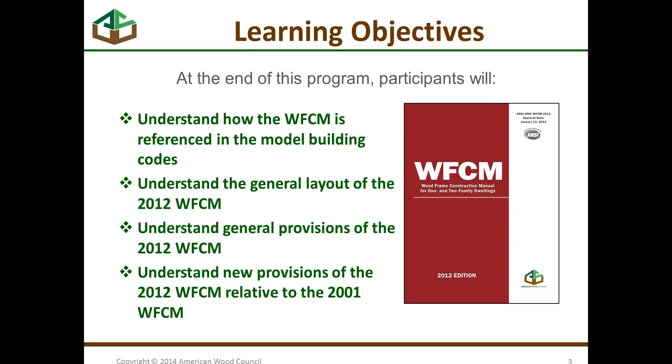This presentation is registered with ICC, as Marcy mentioned, and it is copyrighted through the American Wood Council. The learning objectives today will be to understand how the wood frame construction manual is referenced in the model codes. We'll understand the general layout of the wood frame construction manual, and then you'll hopefully understand the general provisions in the wood frame construction manual, and then finally we'll also go over new provisions from the 2001 to the 2012, so you'll get to know the 2012 changes.

Now, also, the general outline of the presentation, so you can get an idea of how we're going to proceed through this session, is we'll go with a baseline about code references. How is the wood frame construction manual referenced in the codes? And then we'll go chapter by chapter, chapter 1, 2, and 3, on a discussion of the chapters, so that you become familiar with the chapters and go over the changes in the 2012 version. Now Buddy will pick up during chapter 3, and then he'll get into some further information on the commentary to supplement, and then also future information on how the wood frame construction manual will expand its applications. And then we'll go into other resources.

Now, as Marcy mentioned, we are using an interesting tool, which is the polling tool, to get more interaction from the audience, and in no way does this affect your ability to receive your certificate of completion. But the first poll is a very easy one, to get an idea of what the audience makeup is. We'll launch this poll, and you can click on your computer, and the first question is, what is your area of expertise? And I see that people are quickly responding. We'll just wait till we get a few areas of responding. Looks like heavy engineering. Come on, builders, let's put in your input, and architects. Okay, we have a good feel for who is attending, so we'll close the poll. We're at 82% of the audience has responded, and we'll close it.

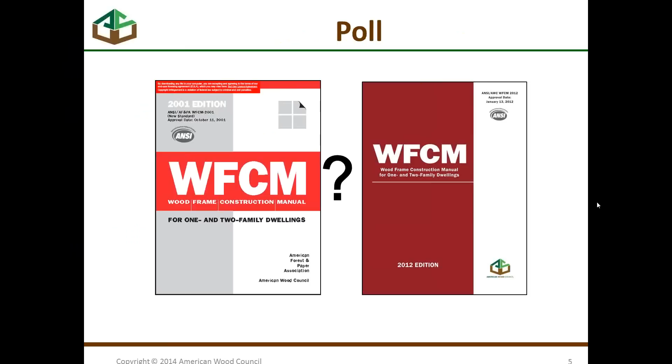Okay, what happened? Uh-oh. I closed the poll and now something happened. Okay, I'm going to have to escape out of this. Sorry about this. Something happened when I closed the poll. So I am sharing the poll right now, and for some reason, let me go back into it. Are you seeing the poll?

71% of the audience is engineering, and 9% is architects, and 16% is code officials, and 2% is builders, and then we have 2% of other.

So the next question has to do with getting a little bit more feedback on the background of the use of the wood frame construction manual, just to give an idea of the audience. So we'd like to know which of the following statements is true. I've used the 2001 wood frame construction manual. I've used the 2012 wood frame construction manual. Or you've never used it at all, and you've never even heard of the wood frame construction manual.

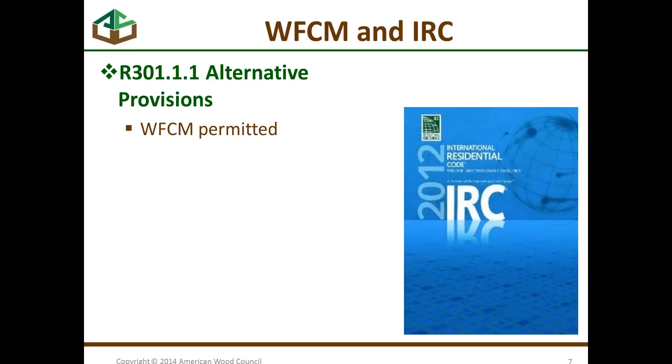So the wood frame construction manual is adopted under the IRC 2012. And here's the specific code reference where it's adopted as an alternate to the IRC. Also for wind design, when we have buildings that are required to have wind design or where the wind speeds are greater than or equal to 110 miles per hour, you can also use the wood frame construction manual. Note that it states that you can use the wood frame construction manual or ICC 600, which is a relatively new standard that's adopted in the IRC.

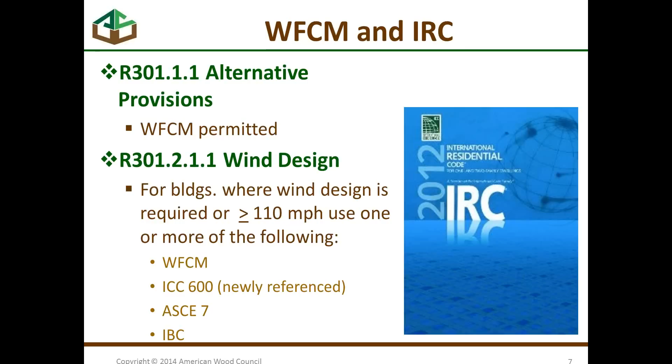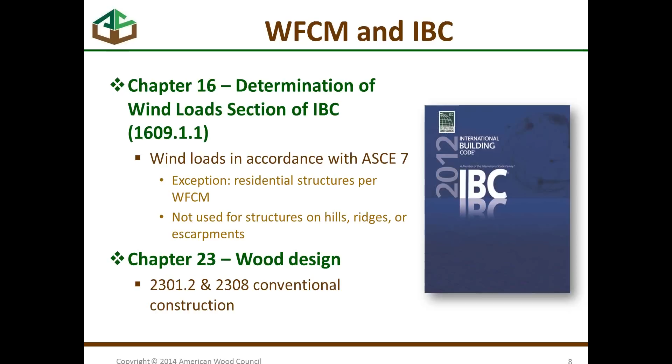And within this is for residential construction in high wind areas. It does mention that if you're designing a wood building using the ICC 600, then it needs to comply with the wood frame construction manual. So that's one reference. So for wind design, the wood frame construction manual is a great resource to go to for designing. Also, under the IBC, it's referenced under Chapter 16 for wind loads, for those that are for residential applications. And then in the next slide I'll explain that a little more. But under Chapter 23, it's referenced as a standard. For those buildings that you're using the conventional construction, the wood frame construction manual is referenced as a standard to be used under conventional construction as well.

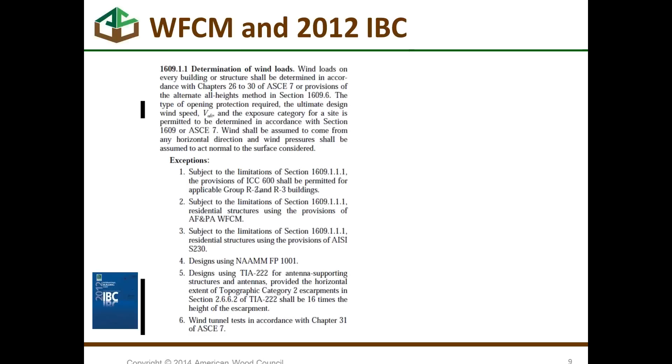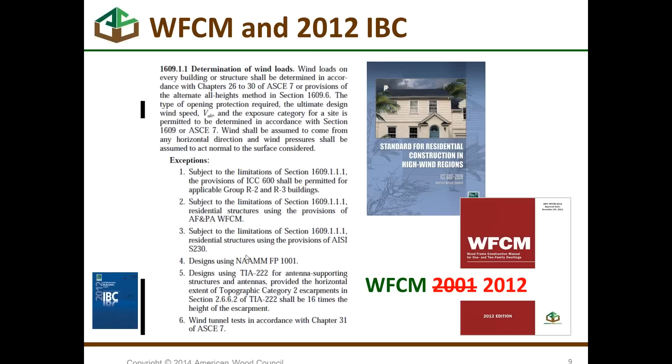So I mentioned using it for wind loads under the IBC, and this is the exact statement from the IBC code. First it says for determining wind loads, you can go to ASCE 7, but it also says that, subject to the limitation of 1609.1.1, you're allowed to use the ICC 600, which I mentioned previously, and that's for residential R2 and R3 buildings. But it also states you can use the wood frame construction manual. Now the previous code referenced 2001, and the current 2012 code references 2012. And this says within the limitations of 1609.1.1, that has to do with escarpments or hillside applications where you have some special requirements. But other than that, you're allowed to use the wood frame construction manual. And I'll go into that in a little bit regarding the ASCE 7-10 and some items related to that.

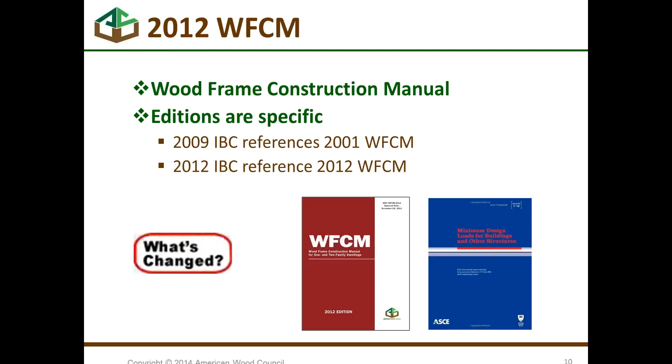But again, under the 2009 IBC, it referenced the 2001 wood frame construction manual. And then under the 2012 IBC, it references the 2012 wood frame construction manual. Now, what's handy about our website is if you go to our website, there are all these little icons that say what's changed. If you click on that icon, that'll provide you with a really quick white paper about what has changed from the previous editions. And that's true for our NDS documents or our wind and seismic provisions. This little icon will give you more in-depth information about the changes.

Now, the wood frame construction manual is laid out in 3 different chapters. We'll start off with chapter 1, which is a general chapter, and then chapter 2 covers engineered design, and chapter 3 covers prescriptive design. So there are 2 methods of design that can be used under the wood frame construction manual. As I mentioned previously, I'll go through chapter 1 and chapter 2, and Buddy will pick up on chapter 3, rounding up. But the general layout of chapters 1 and 2 is connections, then it gets into floor systems and wall systems and roof systems. And this is kind of a reverse of how we would design an actual building. Typically we would start from the roof and work our way down, but it's laid out this way to mirror the layout of the IRC, the International Residential Code. And then we have a supplement that's part of the wood frame construction manual and the commentary, which Buddy will give more information on in his presentation.

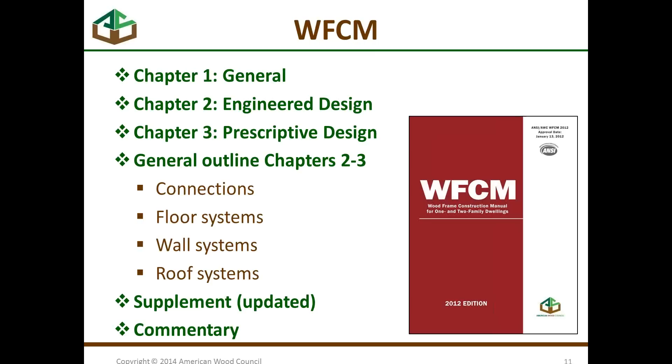But first, starting off with general. If you have your wood frame construction manual, you may want to go through and follow along with this. It would be helpful. If not, it's not a problem. We are going to have the notes available after the presentation, or Brian is giving you links to the PDF

of the presentation. But starting off with the wood frame construction manual, chapter 1 starts off with the general provisions for the entire manual, and it gives you tips on the limitations that are provided for this. As many of you are aware, we need to provide some boundaries or guidelines by which we design buildings, and the same is true as what we provide as guidelines for developing the manual. This provides you with overall building dimensions and then load assumptions that were used when creating the document.

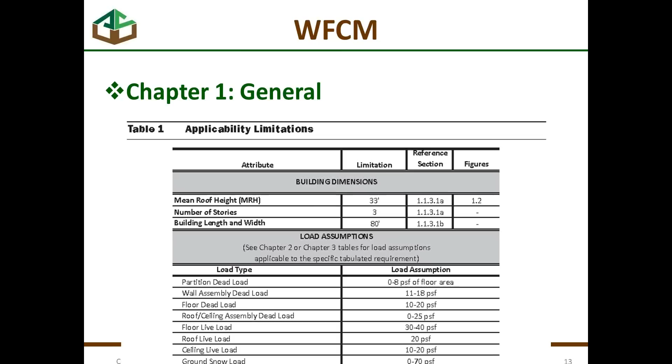And then chapter 2 and chapter 3, when it breaks into engineered and prescriptive, there are also some additional load assumptions that are provided. And that's all in table 1 of each of the chapters. As you noted in the previous, there are special limitations that are noted for the actual overall dimensions of the building, and they're repeated here. Mean roof height of 33 feet, 3 stories, and then the overall dimension of the building is 80 by 80.

But one thing that is new to the 2012 wood frame construction manual is the incorporation of the design requirements in ASCE 7-10. That is new. So now we're all up to speed with ASCE 7-10. These are the parameters that we cover within the wood frame construction manual, which is 0 to 70 psf ground snow load, and then 110 to 195 miles per hour wind speed.

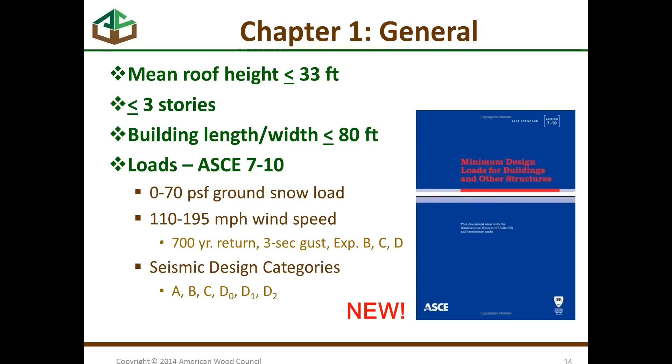And I'll get into a little bit more detail about the wind speed, but we also cover seismic design categories A, B, C, and D. Now, D, some of you may not recognize this if you're only using IBC, but IRC uses these subcategories of D sub 0, 1, and 2. And the seismic design is based on the alternative simplified method in ASCE 7. So something to be aware of. So this is all new to the wood frame construction manual.

Now also, just as a side note on the background of ASCE 7-10 and some things that you might want to be aware of regarding ASCE 7-10 relative to ASCE 7-05 is the balanced and unbalanced loads. It does take into account the ground snow loads. Now that is not different from 7-5, ASCE 7-5, because that was incorporated in ASCE 7-5, but we just wanted to make you aware. It still takes into consideration unbalanced and balanced loads. So there's relatively unchanged values from the 7-5 to the 7-10.

Now, the wood frame construction manual does not take into account sliding snow, because that is really a load condition that is specific to a building, and we couldn't really provide that for all different types of buildings. So that is not in consideration. That will have to be approached or designed separately.

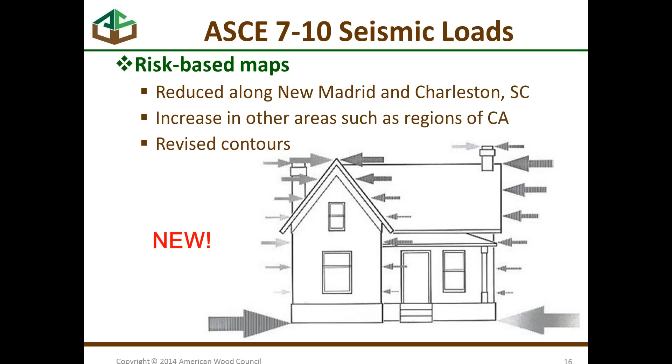And more side notes related to wind speed maps is, if you're using the code now, you would see that they are strength design based maps now that show higher wind speeds, but the overall effectiveness of the wind effective pressures remain about the same.

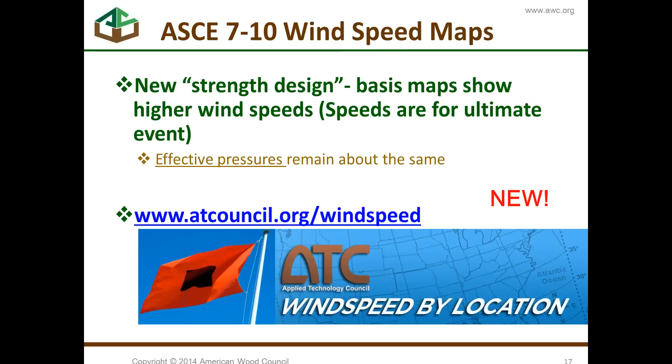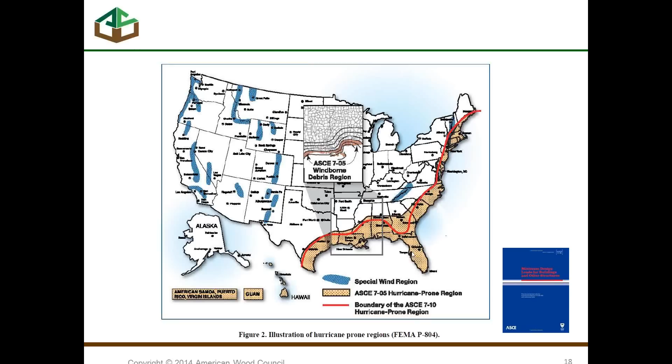the ASCE 7-05 area, and then the red line delineates what the new contour lines are for ASCE 7 for the hurricane-prone region. So you can see in some areas you're going to get a reduction in your wind speeds and overall pressure, whereas these will remain the same because the new contour maps have not changed. But that's where you're going to see some changes.

Now, getting back to the wind speeds, this is important because there are some subtle differences between IRC and IBC. The IRC did not adopt ASCE 7-10, and they're still on the allowable stress design. This is the basic wind speeds under ASCE 7, and if you did a calculation, the equivalent wind speed would be 110 under the ultimate or the strength design, and then 116, so accordingly 110 would be 142. So that gives you the actual mathematical increase if you're going to the ASCE 7-10.

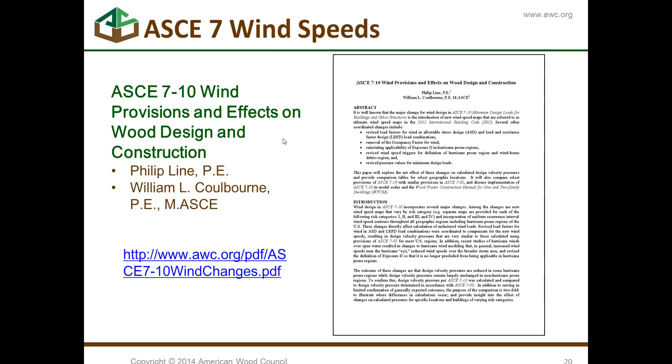So using those maps, if we go back, we look at IRC, which is based on allowable stress design, we have 85, 90, and 100. However, using the wind maps under ASCE 7-10, you can see that, and again, these are the equivalents, so you have 100, the equivalent is 129, but the map in ASCE 7 shows a 130 contour or 140 or 150. So there's not a direct correlation between the maps in ASCE 7-10 and ASCE 7-05.

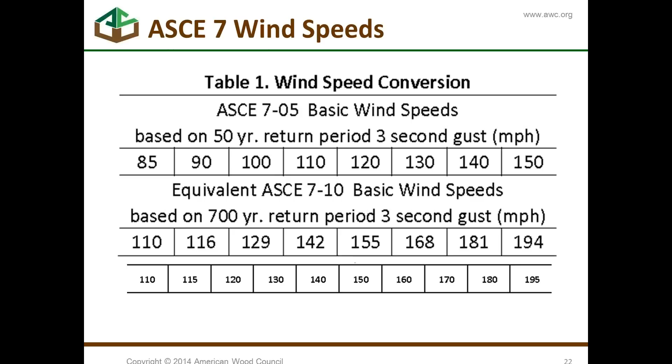So you'll have to work with the building officials if you want to use the maps in ASCE 7-10 and figure out which contour you will use, because at 160 or 130 miles per hour, the ultimate would be 168, but would you use 170 or would you use 160? Again, you'll have to work with the building official on what values you want to use. But the one thing to remember is that the Wood Frame Construction Manual is based on ASCE 7-10. Hopefully this hasn't confused you, and if you need more clarification, you can contact us and we can hopefully explain it. But that white paper will explain it in more depth.

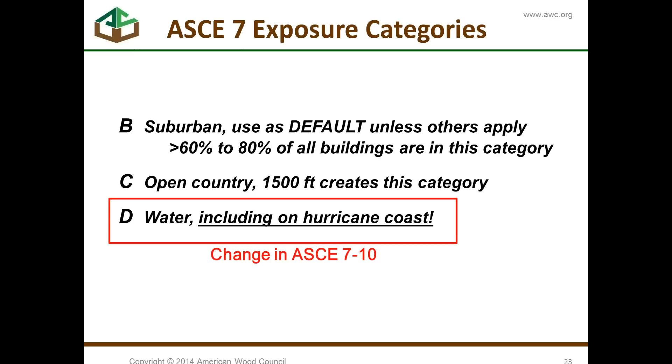Now, the wind exposure categories are incorporated within the maps, and for the hurricane-prone areas, it does incorporate, again, exposure D in those hurricane coastal areas. One thing to be aware of. Getting back to the Wood Frame Construction Manual and Chapter 1, we're going over all the basic lateral loads and the dead loads and all of that.

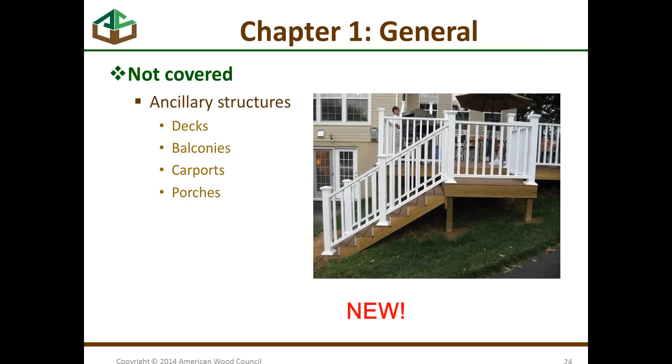One thing that is new to the Wood Frame Construction Manual is a clarification of what is not covered in the Wood Frame Construction Manual, and that is those ancillary structures such as decks, balconies, carports, and porches. Those are not covered, so you'll have to look at another resource for designing those. For example, DCA 6 for designing the deck, which is a free download from the American Wood Council website and covers deck design.

Now, we'll do a poll. This is our third poll. And again, your certificate of completion is not dependent on your answer for the poll. But the question is: does the Wood Frame Construction Manual include both engineered and prescriptive design? The answer is either true or false. Does the Wood Frame Construction Manual include both engineered design and prescriptive design?

And we are getting some really good responses from the audience. Good participation, actually excellent participation. And we're at about 75. I'm just going to close it right now for sake of time, but the majority of the audience has participated. I'm closing it, and I'm going to share the results. And the results are 89% of the audience that responded said it's true, and 11% said it's false.

Well, the answer is, let me go to this, the Wood Frame Construction Manual includes both engineered design and prescriptive design. So again, your certificate does not depend on the answer, but the response is true. Yes, it includes both engineered design and prescriptive design. Now we'll get into Chapter 2, and we'll cover the engineered portion of the Wood Frame Construction Manual.

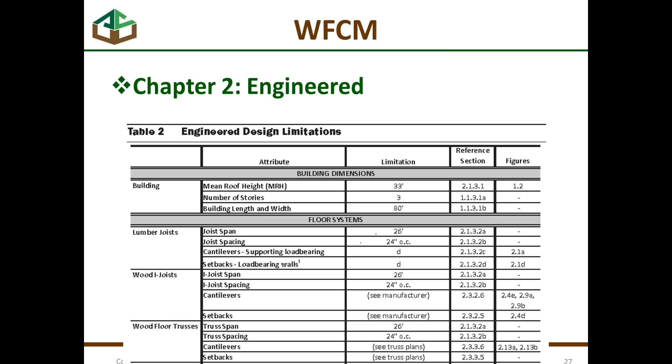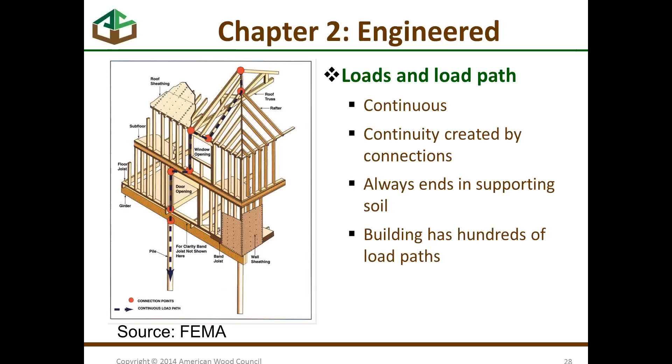Sorry about that, audience. Okay, so the Wood Frame Construction Manual has an engineered table that shows you the engineered design limitations. And backing up, when we design a building, we want to make sure that there's a continuous load path through the building, meaning that there's continuity created by the connections from the point of origin. It all needs to go down to the soil. So there are a lot of different load paths throughout the building. We don't want to rely on, many of you may have heard of that term, skyhook. There is no such thing as a skyhook, except in your imagination, but not in real life in buildings.

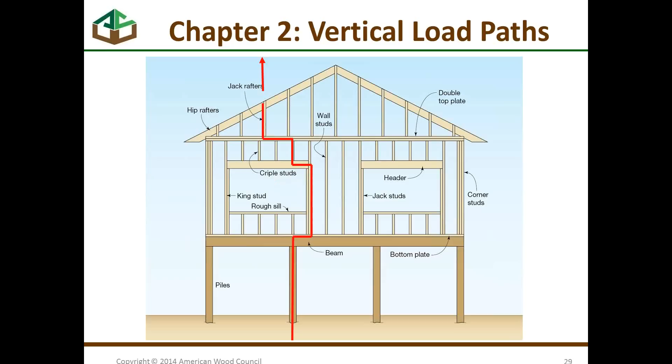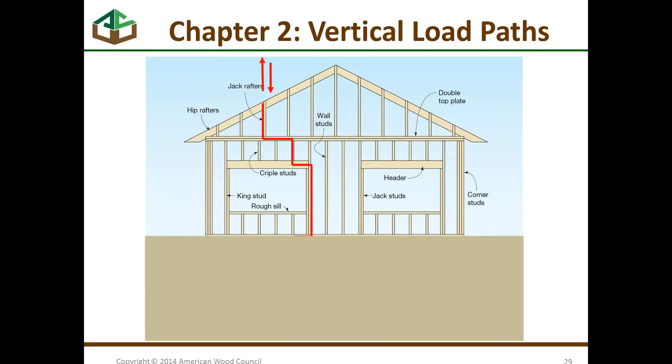We want to follow that continuous load path. Whether it's vertical loads, we want to make sure all that load gets transferred throughout the building all the way to the foundation, whether it's a building on piles or a building on a foundation. It all has to be complete, and that's the assumption in creating Chapter 2. Also for lateral loads, this is very important, and this is something that's not always intuitive to engineers or architects or builders, because we don't always deal with it, it has to be a complete load path from the point of origin to the foundation. And again, that applies to a raised pile building or one that's on slab on grade or a raised floor on grade.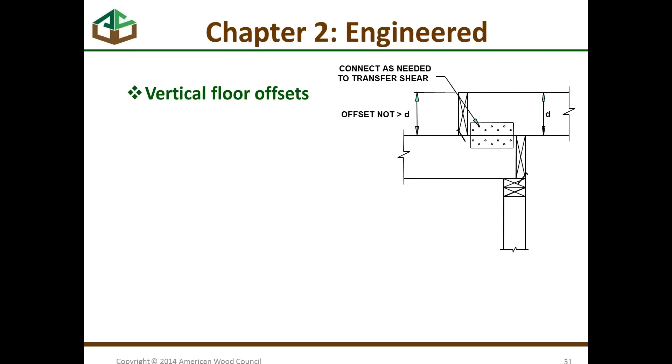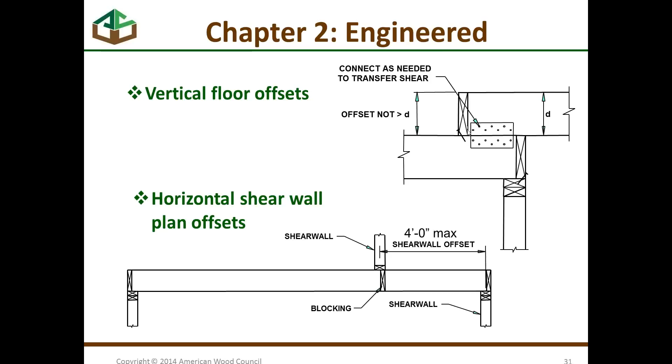Now, the engineered portion also provides you with parameters on what the assumptions are when engineering a building. If you have a floor that has a vertical offset, that offset is limited to D, which is the depth of the joist. It can't be anything greater than that. For horizontal offsets, say a shear wall, the maximum offset from the shear wall below is 4 feet maximum. And of course, throughout both of these situations, there needs to be that complete load path of engineering the transition of loads to make sure it's going to the point of resistance.

Now, connections. I wanted to go over a little bit of the vocabulary that's used throughout the presentation related to connections, because I saw when Buddy and I were going through it, maybe this is an East Coast or a West Coast thing, but the whole vocabulary of out of plane and in plane, there are 4 categories that I wanted to go over. One is when we're dealing with connections and we're talking about lateral, there's a section on lateral. We're talking about out of plane, not in plane, but out of plane connections.

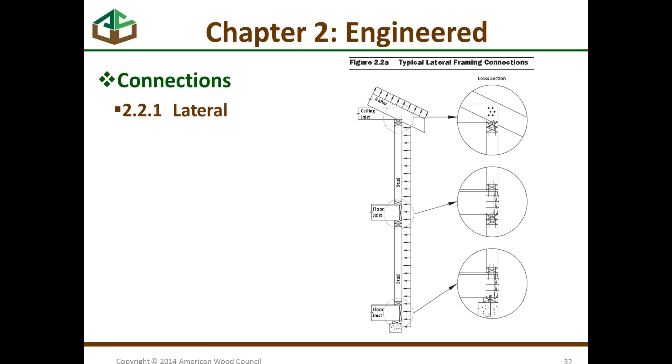So here's a building, and this is something that I changed in the notes. I'll change this in the PDF because it showed an incorrect figure. But when we're talking about lateral, the lateral is out of plane. So anything out of plane, a connection that connects this wall to the resisting diaphragm, is out of plane. That's lateral. Now we're talking about shear. Shear is in plane. So whatever is in the plane of the wall is shear.

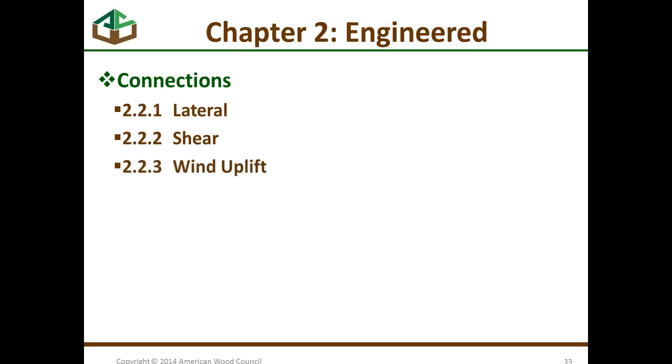And then if we're talking about uplift, we're talking about the rafters being lifted up or the whole wall being lifted up, the resistance of uplift due to wind loads on the building. And then if we're talking about overturning, we're talking about the overturning of a shear wall. So it's the overturning of the shear wall in plane. And this is to provide some dimensionality when we're reading through a document. You don't always get that dimensionality of which direction we're talking about.

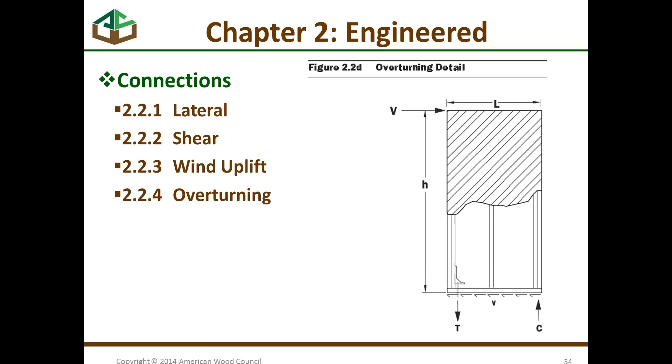So this, to be clear, and this is explained in these sections, overturning is the overturning of the shear wall, and uplift is the uplift related to wind, vertical uplift. Because sometimes if you're talking about seismic, you could say the uplift at the end of the shear wall, but that's not what we're talking about. Hopefully that clarifies it. If you need more information, you can go to those sections and get more information.

Okay, also included in the engineered portion of this is, and this is the great thing about this manual, how it will tabulate the loads for you so you don't have to go through all the calculations to find out what load you need to design a certain connection. This wood frame construction manual will provide that for you. So you just go through a table and say you're designing a thrust connection or you have a collar tie or a rafter tie. This will provide you with the output.

Say if you have 20 pounds per square foot, your pitch of your roof is 6 and 12, and your span of your roof is 20 feet, the actual load that you need to design for is 300 pounds. So pounds per linear foot, sorry, on that roof. So that's the connection load that you will need to design. It does that calculation for you.

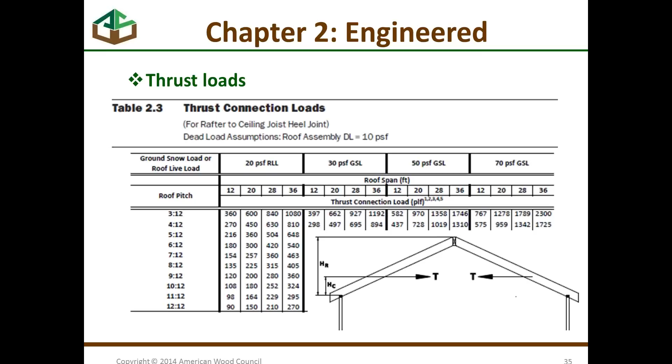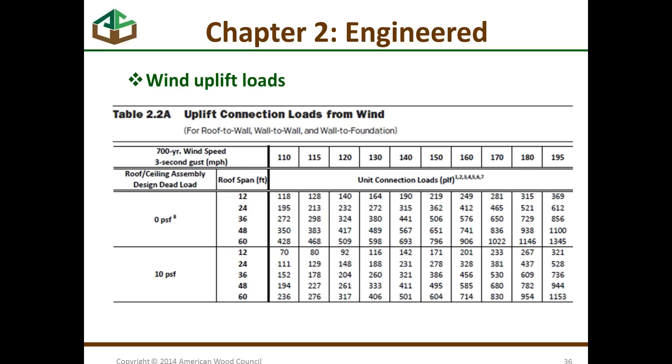In addition, uplift connections. If you're doing an uplift on a building, this will provide you. You just go to this tabulated load and you pull out the 140 miles per hour. Your roof span is 36 feet. It'll give you 321 uplift pounds per linear foot. That's what the connection needs to design for. So it does all the calculations for you, and it's all tabulated.

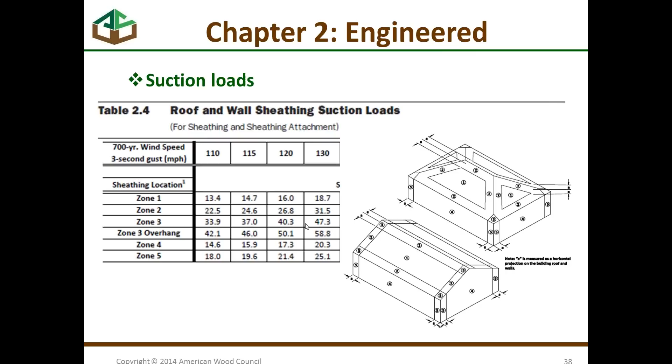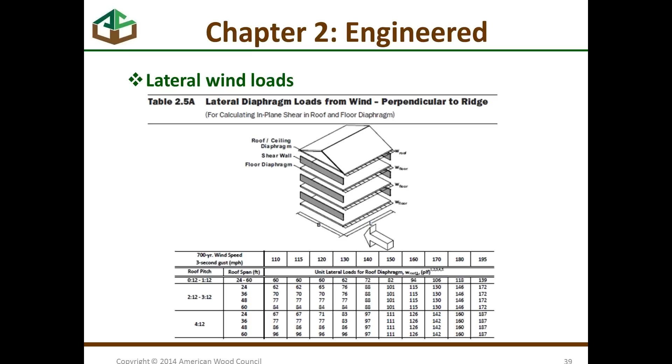It'll also provide you with the wind load suctions, so you don't have to go through all the rigorous calculations in the zones. It gives you the actual wind loads for that building. And then lateral load, the wind loads for the diaphragms. I'm sorry, this table covers the diaphragms. It gives you those lateral loads. Again, making it quick shortcuts so you can just pull the values out of the table and then design your diaphragm accordingly.

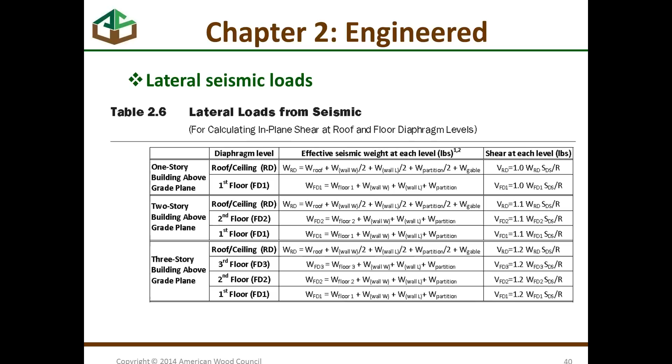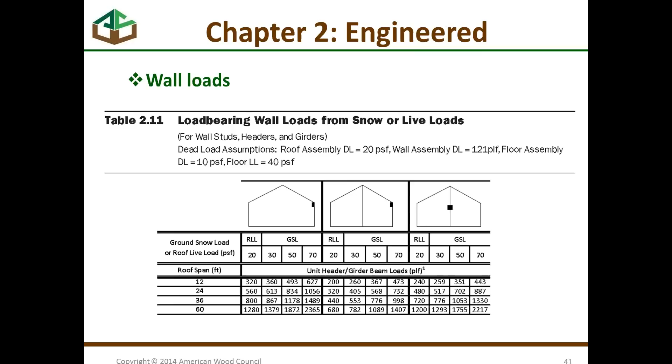And then lastly, the seismic loads. Because there are so many different parameters for seismic loads, it does not give you the actual load, but it gives you the equations for calculating the seismic load. And then this is true for load-bearing walls. So for snow loads and live loads, it gives you the unit header or girder beam loads for that girder or beam in that line. So very handy tables to help.

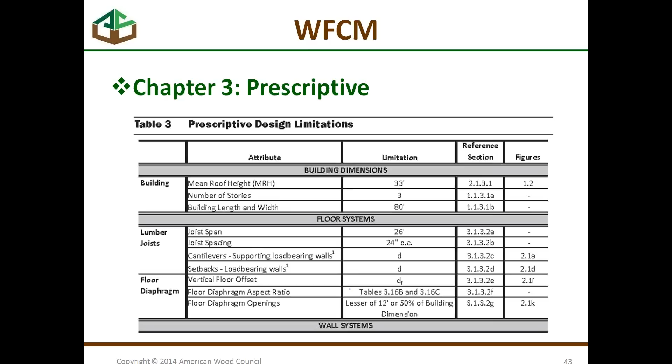Here we've actually tabulated those floor diaphragm limits in tables 3.16B and C, so you'd have to check there to make sure that your structure is within those limits to be able to use Chapter 3. Another feature of the wood frame construction manual is if you exceed the limits of, say, the prescriptive section, it gives you the option to go back to the engineered section and use that if you're within the limits of the engineered provisions, and then if you fall outside of the engineered provisions, it gives you the option to go out and use an NDS or wind and seismic standards, something like that.

So what are prescriptive provisions? They provide very specific resistance requirements. So Michelle's done a great job sharing with you about the load provisions of the standards.

So we, in Chapter 2, show you the snow loads, the wind loads, the seismic loads, and how those are going to be present on different parts of the structure. In Chapter 3, then, we give a solution to resist those loads, what's called a prescriptive solution. So we'll give the size of the header or the rafter or the floor joist or the number of connections needed to connect those building elements together to resist those shear, lateral, and uplift loads that she talked about as well. And so the table's a really handy approach to see if you're within those limits, to see if you can even use those prescriptive requirements.

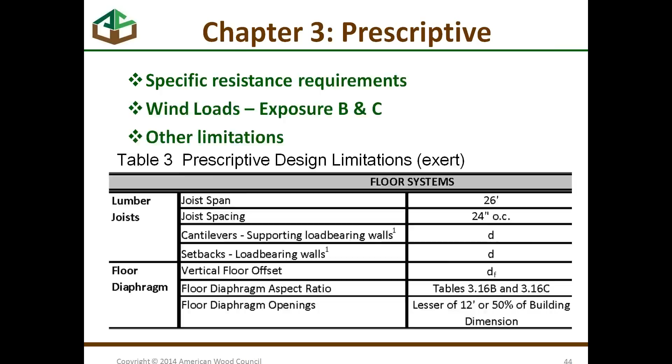One of the things that's new to Chapter 3 is the shear wall offsets. In the 2001 wood frame construction manual, we made some statement to the effect that you could have a shear wall offset by this distance D as long as you maintain your load path. Well, that typically required an engineer or somebody to spec out something for that load path. So we added some detailing here, and then for the cantilever as well, to show how to maintain that load path and resist those overturning loads that would be present in the shear walls that are on offsets. So those are some of the new details you'll see.

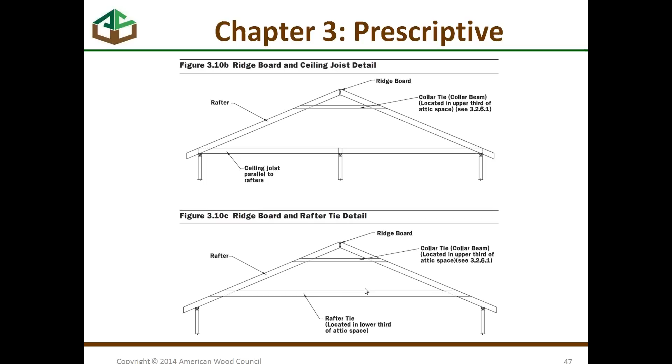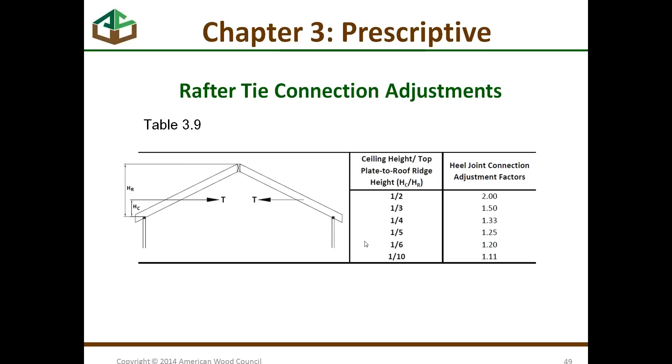And so we talk a little bit more in other chapters about those adjustments, because when you get that thrust at the heels, it's going to be much higher as you move your rafter tie higher up into the attic space here vertically, and so those loads increase. So you have these increase factors. So where if you were able to use, say, 4 nails here at the heel for a ceiling joist to resist that thrust, if you go up at least halfway into the vertical space, you see the factor here for 1/2 is a factor of 2, so that would require 8 nails instead of 4. And so we account for that in the tabulated values as well to make sure that you can maintain the load path down through the structure.

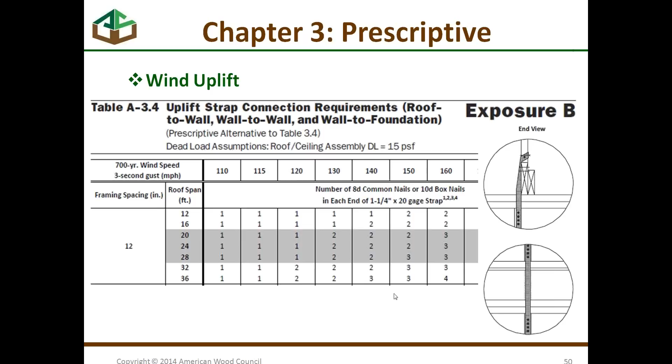Michelle talked about uplift, and so we tabulate uplift strap requirements to strap down the rafters or between floors, wall to wall. And so we'll show in a table like this the number of 8-penny common nails or 10D box nails that you need in each end of one of these straps for different wind speeds, for different framing spacing. Again, makes it real easy to pull value out of the table to see how you resist those uplift loads.

Another new feature in the 2012 Wood Frame Construction Manual then shows how you can use wood structural panels to resist not only shear in your shear walls, but you can also combine to resist uplift and shear simultaneously with a wood structural panel. So this table 3.4b is real handy. You come into that table knowing what your shear wall requirements are, so you have to design your shear walls first with the applicable tables for shear wall design. I'll show a couple of those in a second.

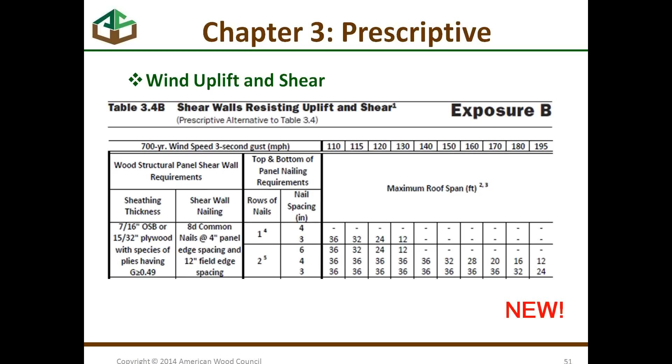And then you come into this table and it shows you that if you increase your nail spacing to, say, 3 inches on center rather than 4 inches on center for your shear wall design, that for 120 mile per hour zone, for example, you can have a maximum roof span up to 24 feet. If you double up the row of nails in that shear wall along your top or bottom plate, then you see you can get even greater roof spans. So this table makes it real easy to come in and make your nail spacing a little denser to handle both uplift and shear, and that way get rid of all those metal straps that are required otherwise in the structure. So that's a new feature.

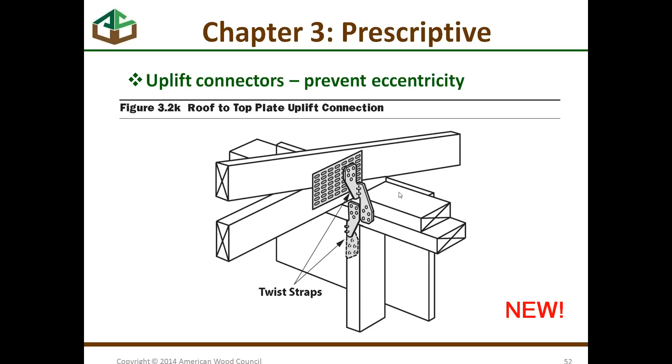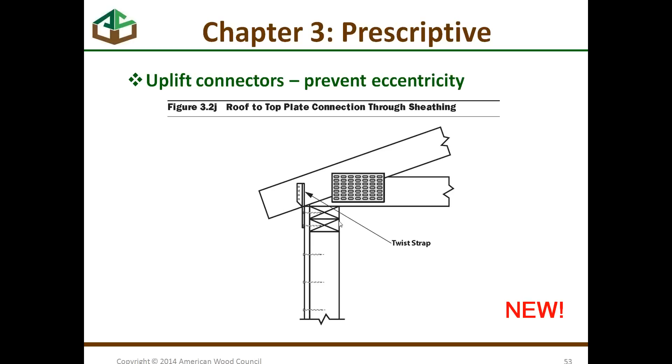The other new features to make sure that when we're maintaining that load path, that we line up our connectors so that we're not creating any cross-grain tension in these top plates. So if you're carrying your uplift loads through straps into the stud on the inside of the structure, then you're going to put this connector here on the inside so that they're lined up and don't put cross-grain bending on that top plate. Likewise, if you're using your sheathing to resist that uplift out here on the exterior, like we just showed you can do, then you're going to put your connector there. Again, it keeps from having cross-grain tension on those top plates.

The shear walls, diaphragms, and shear connections in the Wood Frame Construction Manual have all been revised according to the newest standards, ASCE 7-10, the 2008 Wind and Seismic Standard, and the 2012 NDS. So all the tables are revised to accommodate that.

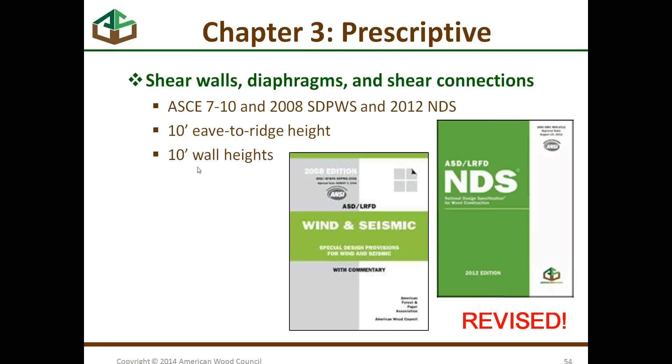We've simplified many of the tables for diaphragm and shear wall design, assuming a 10-foot eave to ridge height. The previous tables required that you tabulate the roof slopes, and you'd have to figure out that mean roof height. So we've just assumed a 10-foot eave to ridge height as sort of a default, and then we've got some footnotes and tables that adjust if your eave to ridge height is something different from that. We've also moved to a 10-foot wall height to the 2012 version as well, so that's new.

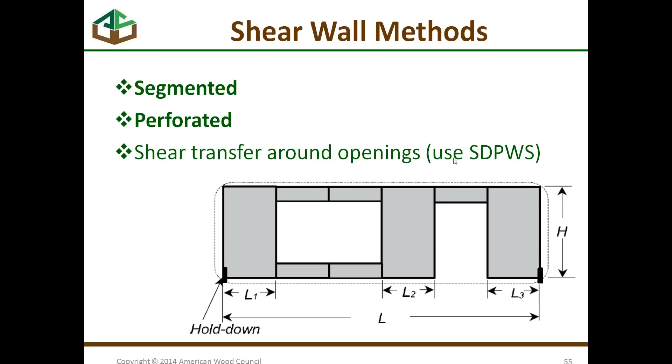Talk a little bit about segmented and perforated shear walls. There are actually 3 methods to design shear walls. There's those 2 that I mentioned, and then there's one called shear transfer around openings. We did not incorporate the shear transfer around openings into the Wood Frame Construction Manual. You'd still use the Wind and Seismic Standard for that. So what you'll see in the Wood Frame Construction Manual is still the segmented approach and the perforated approach. And sometimes we get questions of what that means.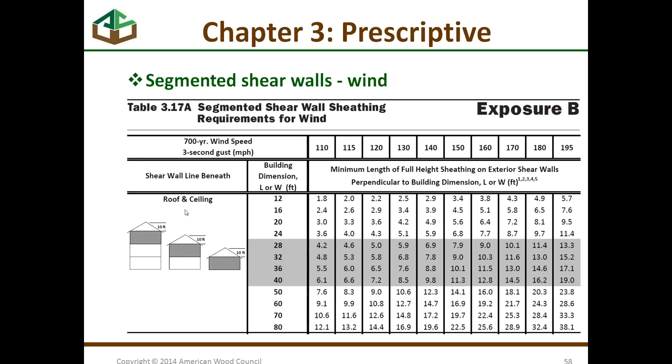To get through that process, we've got these tables that show you how to pick out wall lengths for, say, a segmented shear wall. And we're in exposure B right now, so let's say we've got a 40-foot wall length, and we're trying to figure out how much full height sheathing we need to sheathe that wall. We come over here to, say, 150 mile per hour wind, and we see we need 11.3 feet of shear wall. So we know that 12 feet will work. 3 4-foot panels would then be sufficient to meet the demand for what you need in that 150 mile per hour, assuming you only have a roof and a ceiling. And so that's a real easy table to use.

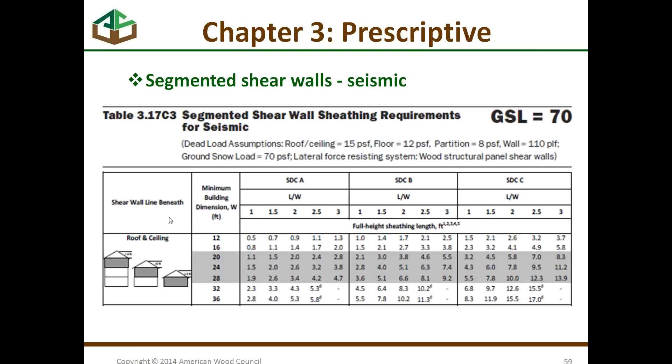Same for seismic. For the different seismic categories, we tabulate seismic design categories A through D and different ground snow loads, 30, 50, and 70. And so, again, if you had a 36-foot building dimension and a seismic design category C, for example, you'd see that requires 15.5 feet, so 4 4-foot panels would work to carry the load through that seismic condition. And it's a pretty good size snow load for that seismic condition. But again, this is only a roof and ceiling. You can go up to 3 stories with the tables in the Wood Frame Construction Manual.

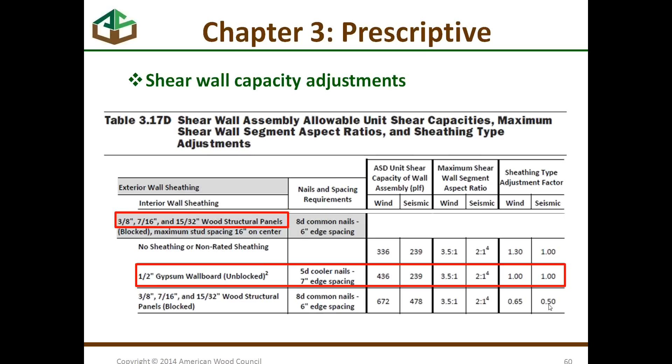We give some pretty standard wall details. So the standard detail is going to be, say, a 7/16 wood structural panel with 8-penny common nails, 6-inch edge spacing, 1/2-inch gypsum, and 5-penny cooler nails in the gypsum. And so you see your adjustment factors are 1.0 for that particular wall. But let's say, for example, you went to a 2-sided shear wall. Instead of using gypsum on the inside, you decided to use 7/16 wood structural panel and have a 2-sided wood structural panel shear wall. These adjustment factors then are what you would multiply what you get in the tables that we showed a little bit earlier to come up with a new length requirement. And so obviously if you're adding sheathing to the inside, that's going to reduce the length of wall needed. And so you can see, for example, that 15 feet of sheathing we needed for seismic goes to about 7.5 feet if you did a 2-sided wall.

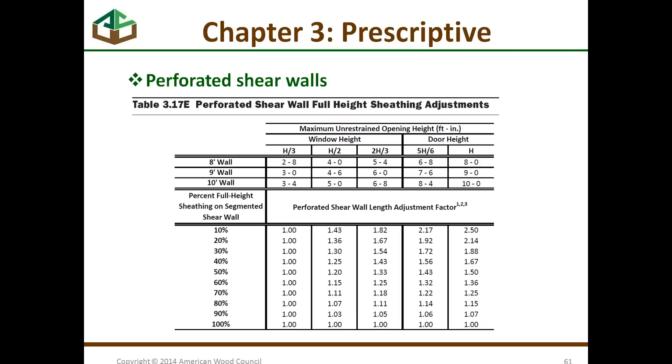perforated shear wall, again back to, say, our seismic example, instead of 16 feet of wall, it's going to require about 40% more sheathing along that wall length. And so 16 feet times 1.4 then would give you the amount of full height sheathing you need to do a perforated shear wall. Again, you're going to increase the panels or nailing or whatever you need in that wall, but the trade-off is that you get to move your hold downs to the corner of the structure.

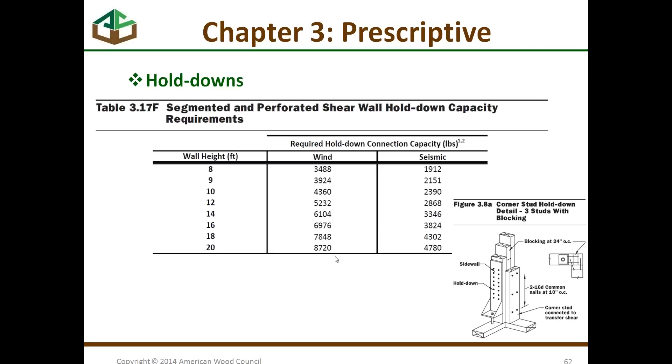Hold downs then are real easy to size because we account for the first panel in the wall picking up 100% of its capacity. So that's why we're able to have a really simple table here that just accounts for the first panel in the wall picking up 100% of its capacity. So you take the wall height and the panel capacity, and that allows you to determine a hold down for wind loads and for seismic loads. They're going to be different here because we are allowed to use gypsum for wind loads and not for seismic. So that's why your hold downs are going to vary. I think you're also allowed a 40% increase for wind loads, and so that's why your hold down capacities are going to be higher, because we're counting on higher capacity of those panels for wind loads.

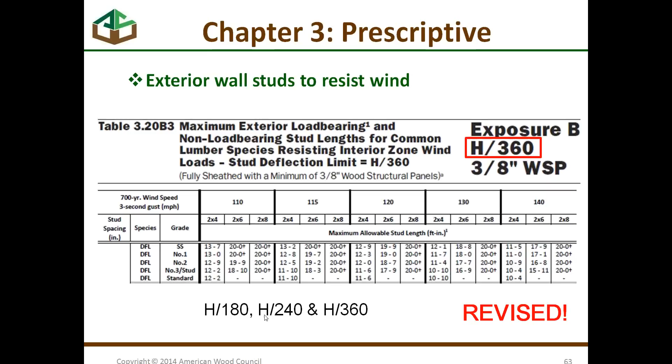Exterior wall studs to resist out-of-plane wind loads. We allow you to design your studs, say in a gable end wall for let's say 120 mile per hour wind load, and that gable end wall you could go up to about 11 foot 6 inches for a number 3 or stud grade material with a 2x4. What's different in the 2012 edition is the old tables were based on an H/120 limit, but because of new provisions in the code and new finishes that are going to be on structures, we've added new tables to incorporate H/180, H/240, and H/360.

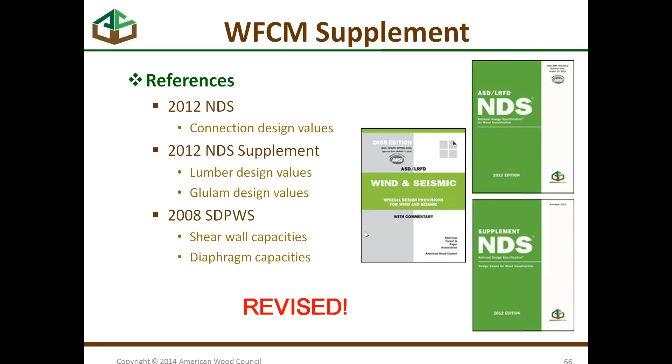The wood frame construction manual supplement has been greatly simplified. We now, instead of duplicating tables from, say, the NDS supplement for design values and the NDS for connection values and wind seismic standard for all the shear wall and diaphragm values, we just reference each of these standards so you're always sure to get the latest information instead of this document maybe getting 1 or 2 cycles out of kilter with the newer standards. So those are all referenced in additional standards.

We've also updated the commentary to make sure that the information is complete and in accordance with the new standards, the new loads. So the commentary is a very valuable tool if you want to find out the background information for how the wind loads from ASCE 7 are determined, or the seismic loads, or any assumptions related to the tables in the wood frame construction manual. You go to the commentary to find that information.

So Michelle, I'm going to ask you to join me again. It looks like we've got another poll here to wrap up, and then we'll have some time for questions. Okay.

Okay, let's see. The last poll, and again, I know there were some questions coming in on whether or not this affects your ability to get a certificate, and this does not affect your ability to get a certificate.

Okay, so this question has to do with which type of shear walls are included in the wood frame construction manual. A, segmented shear walls. B, segmented and perforated shear walls. Or C, segmented, perforated, and force transfer around opening shear walls. So the audience is voting.

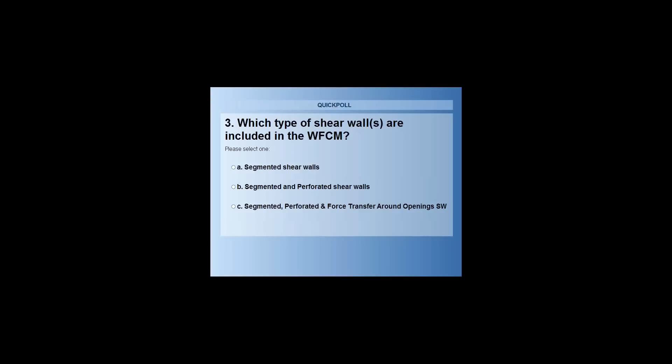Again, here's the question. Which type of shear walls are included in the wood frame construction manual? A, segmented shear walls, B, segmented and perforated shear walls, or C, segmented, perforated, and force transfer around opening shear walls. And you can select one only. I don't know if it allows you to change your answer when you're doing this, but okay, we're at 81%. I'll go ahead and close the poll so we get a good feel, and we'll share it with you.

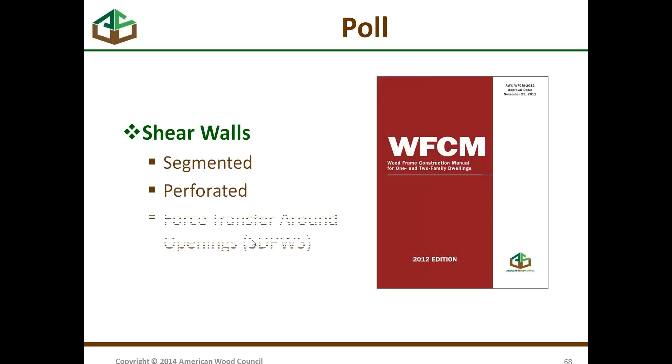So the answers are 2% of those who responded said segmented shear walls, and 77% said segmented and perforated shear walls, and 21% said segmented, perforated, and force transfer around openings. And the correct answer is B, segmented and perforated. We mentioned earlier there is a force transfer around openings approach, but that's covered only in the wind and seismic standard. So answer B was correct. Segmented and perforated are covered in the wood frame construction manual.

So let me give you a little bit more information about what's coming in the 2015 IBC. You might be interested to know that we are developing a 2015 version of the wood frame construction manual to pick up primarily the changes to southern pine design values. And that reminds me, if you do get the 2012 version of the wood frame construction manual, it will come with an addendum that includes all the changes to southern pine design values. If you're interested in seeing that now, you can go to our website and download that as well. Maybe Brian can put a link up for that as well here toward the end.

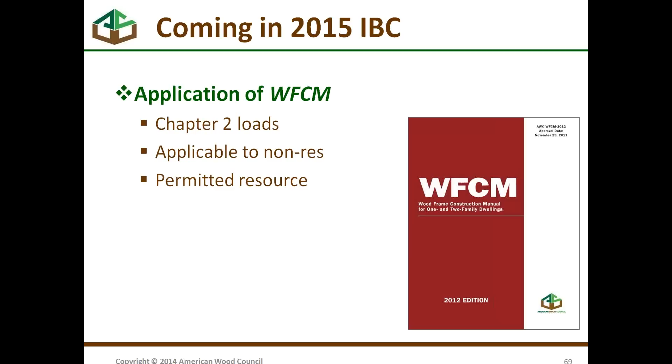But in the 2015 IBC, there's some changes that we're excited about because it gives the ability to use the wood frame construction manual in some non-res applications as a permitted resource. We'll go to the code change that actually was approved here in this last cycle that will be published later this year. But basically it creates, down here at the bottom, you see a brand new section in the 2015 IBC, 2309. It says structural design in accordance with the wood frame construction manual shall be permitted for buildings in any use group subject to the limitations of section 1.1.3 of the WFCM and load assumptions contained therein.

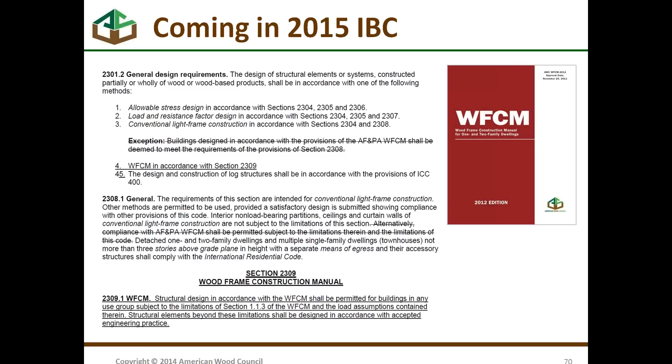So what that basically tells you, and a good example would be if you have a one-story slab-on-grade structure, the wind loads don't know whether they're hitting a commercial building or a residential structure. And so the wind loads are going to be similar if you've got a similar footprint of a building. Where you're going to run into difficulty for some of your non-res applications is the wood frame construction manual does only list floor loads up to 40 pounds per square foot live load. So a lot of your commercial buildings, corridors and floors are going to have 50, 60, 100 pound per square foot live load. So as soon as you get into multi-story structures, the usability of the wood frame construction manual is going to become a little bit more limited. But for your one-story slab on grade and some of those smaller commercial non-residential applications, this would be a tool that you could use in the future.

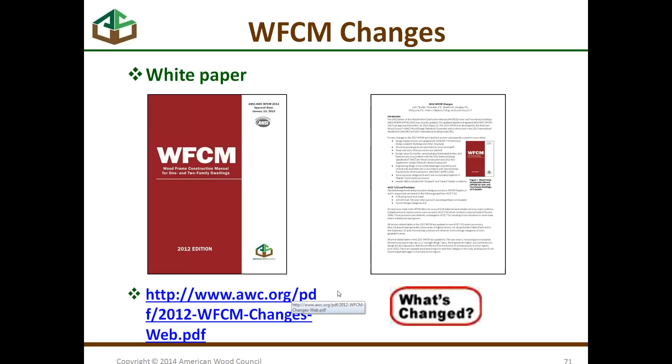So Michelle, I think we've got time for a couple of questions. Why don't you tee a couple of those up, and we'll wrap up our session with a couple of Q&A.